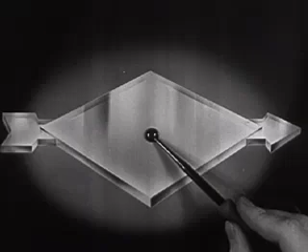For millions of years, this source of power slept peacefully in the dark recesses of the earth until modern magic loosed the liquid energy from its subterranean prison. Great areas became forests of towering derricks. And here's how the petroleum forest grows.

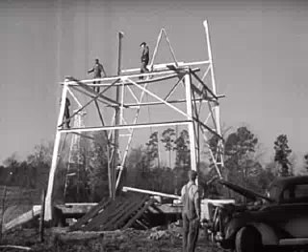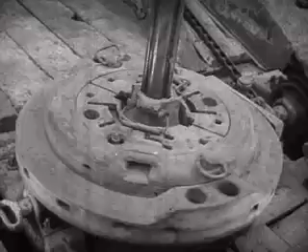A cellar is dug, and a rotary table to turn the drilling stem and the bit is set in place. Round and round the rotary goes, drilling deep down to oil. A steam engine drives the drilling mechanism. They're inserting a length of pipe, lengthening out the stem for deeper drilling. A new joint is waiting.

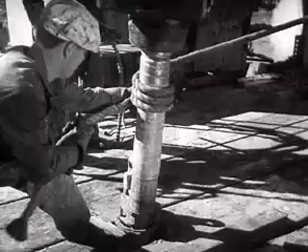Oil field workers are called drillers, roughnecks, roustabouts, rope chokers. The oil field treats our ears to odd and colorful names. Now the drilling stem has been lengthened, then round and round once more.

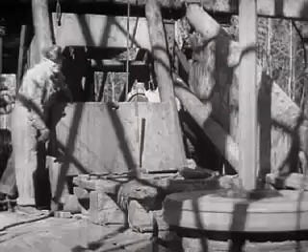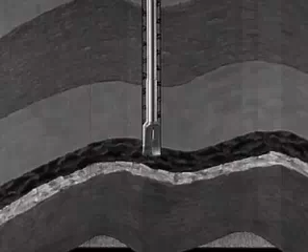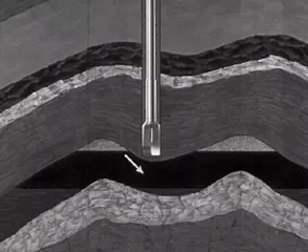Down through layers of sandstone, shale, limestone, down to astonishing depths. This well 5,000 feet. Some 10,000, 2 miles into the earth. And then, after weeks of drilling, fighting against natural obstacles, the drill at last reaches the oil sand, porous rock, which holds the oil much as a sponge holds water.

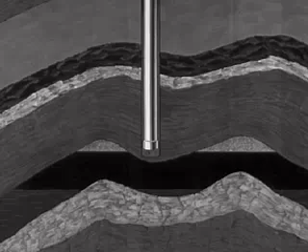Next, the casing is lowered to the bottom of the hole and cemented in position. Then drilled through the oil sand, and a screen is installed at the base of the casing. The screen extends down into the oil sand. The oil flows through the screen, up through the small pipe tubing to the surface.

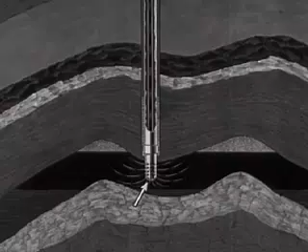So they've struck oil, and now the well must be cleaned of the mixture of drill mud and oil. Some wells flow of their own pressure. Others must be pumped, need power.

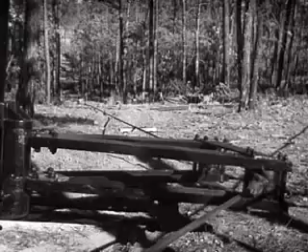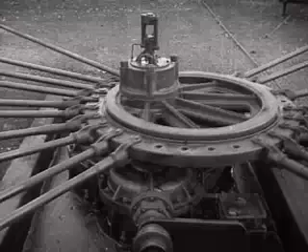The power is transmitted to groups of wells, the ever-swaying rocker arm, the rhythm of pumping, the unceasing heartbeat of the oil fields. A 24-well hookup is the height of oil field power, pumping black magic from 24 drillings in the earth, all at the same time, out of the ground.

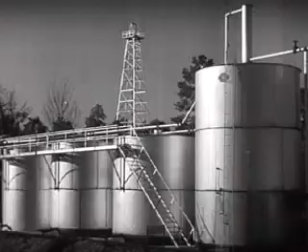The oil is cleaned of natural gas or water, which is combined with it. Next, the petroleum starts on its way through a great network of pipelines. There are powerful pumping stations every 40 or 50 miles to keep it moving along the lines.

The lines of pipe, alive with racing oil, run through forests and over plains to these silver discs. They're storage tanks where the oil rests briefly before it rides the waves in giant tankers. And they're masterpieces of shipbuilding, those tankers of steel. The largest navigate the sea at 15 knots and carry 5.5 million gallons of oil.

The voyage of oil to the refineries. The refinery with its modern structures, technological towers, minarets of science, docks, office buildings, pageant of industry.

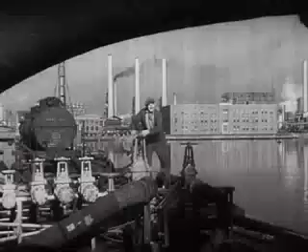Day after day, there is an endless flow of oil as the tankers discharge their liquid cargo. Unloading oil is a vast operation of piping through huge hoses. Discharge pipes on the vessel and receiving lines on the dock are connected, and a cargo of 5 million gallons is discharged in less than 24 hours.

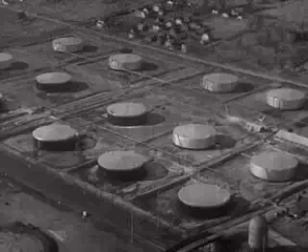No two cargoes of crude oil are alike, so each boatload must be stored in different tanks, and each batch must be processed individually, with laboratory tests to indicate the precise treatment for each.

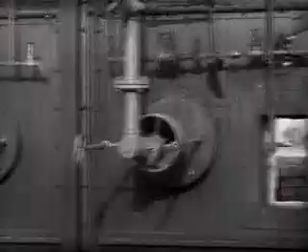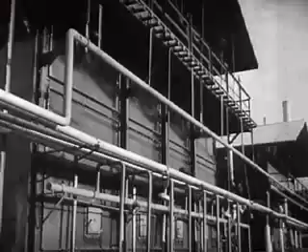That is embodied science. Those masses of strangely wrought steel, forests of stacks, glowering and hissing boilers, leaping and winking fireboxes. Intense heat, the flames roar in the furnace, yet the oil flows so fast the heat does not scorch it. And scientists wrest from the crude petroleum its tremendous power in the form of gasoline and other fuel oils.

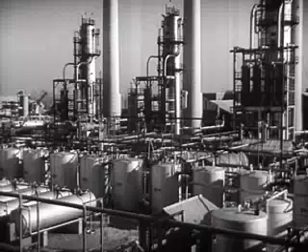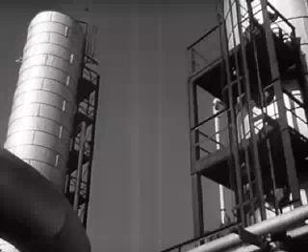And that's done in these towers called fractionating towers. They divide crude oil into the lighter and heavier parts. Those of different boiling points liquefy at different levels in the towers. Some lighter than gasoline liquefy at the top. Heavier parts liquefy further down. At the bottom are the heavy fuel oils, or the raw materials from which lubricating oils are made.

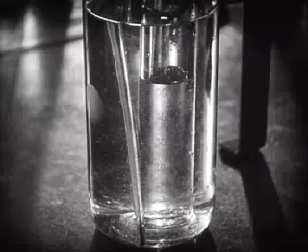When increasing use of motor cars pyramided the demand for gasoline to extraordinary heights, scientists were called upon to devise new methods. How could a greater proportion of gasoline be extracted from the crude oil than that obtained from the fractionating tower alone? To meet this challenge, the scientists turned to products other than gasoline which are drawn from the crude, studied their molecules, and found a way to change them, to turn them into gasoline.

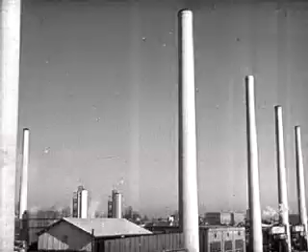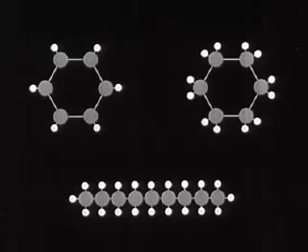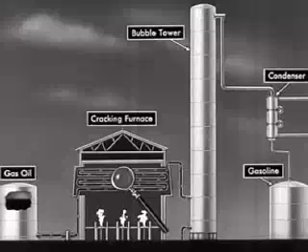These smaller molecules are now no longer gas oil, but are gasoline of high-powered, knockless quality. Some of the gas oil molecules do not fly apart and must be separated from the gasoline. This is done in the bubble tower.

Here the big molecules, which are not gasoline, are held back and come out at the bottom as a liquid. The gasoline goes up the tower as a vapor, comes out at the top, and is condensed into liquid gasoline. Gasoline that gives more power to you.

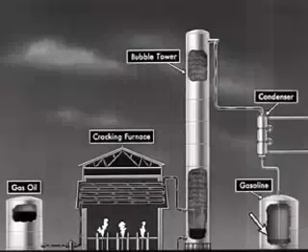Experiment is the key to it all, and this is the experimental laboratory. In the making of powerful motor fuel, the control of temperatures is of extreme importance, and it is measured to an accuracy of 1/100th part of 1 degree.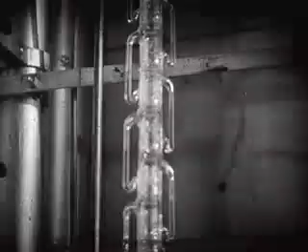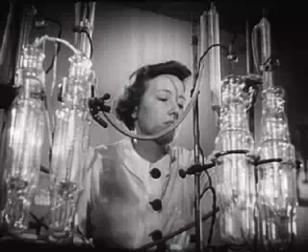Gasoline is broken down into over 200 parts in that elongated tallness of glass, and each individual part is studied. The laboratory with its strange gleaming of new and unpredictable things. Here are created modern miracles with the chemistry of oil.

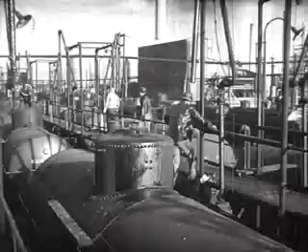Tank farm, to which the motor fuel goes from the refinery and then out to the nation by railroad tank car and by motor barge. Pipelines run their web-like nets under rivers, over mountains, carrying gasoline that goes into millions of gasoline tanks to generate billions of horsepower for the nation.

Oil means horsepower in a horsepower-using world. Briefly, in 4 words, more power to you.